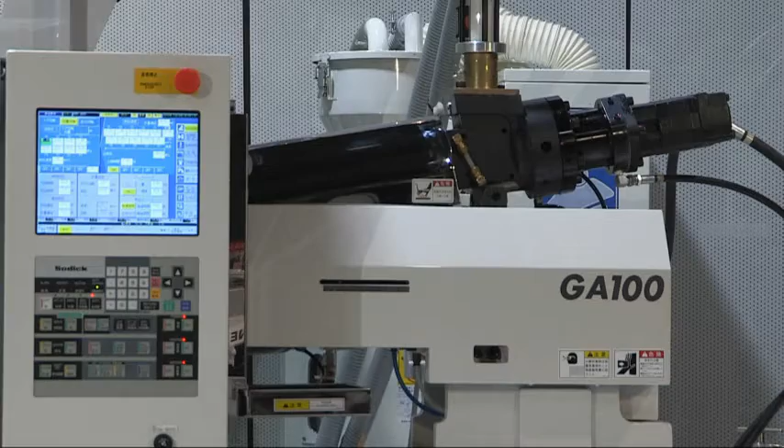Based on ideas which can only be offered by machine tool manufacturers, this machine was created by the integration of high-dimensional technology, which leads the next generation market. We would like to introduce the V-line method injection molding machine.

The reason why Sodick continued to develop the injection molding machine was the numerous unsatisfactory comments made by customers, saying that stable molding could not be performed by the general inline method molding machines. Sodick paid attention to the conventional screw pre-plastication method again and made great improvements with the unique technologies of Sodick to create this V-line method.

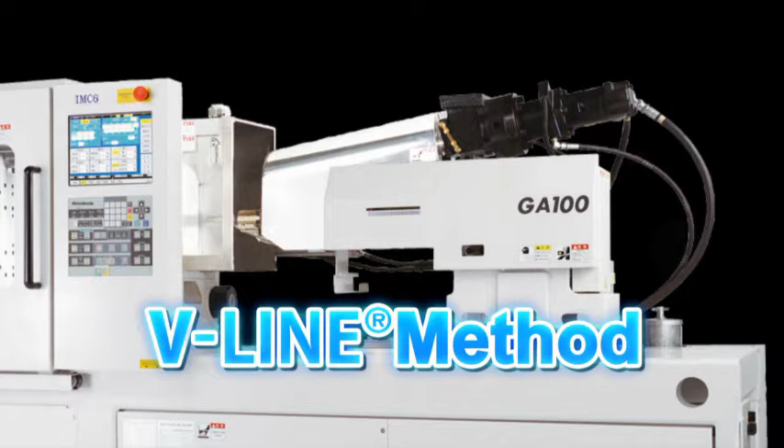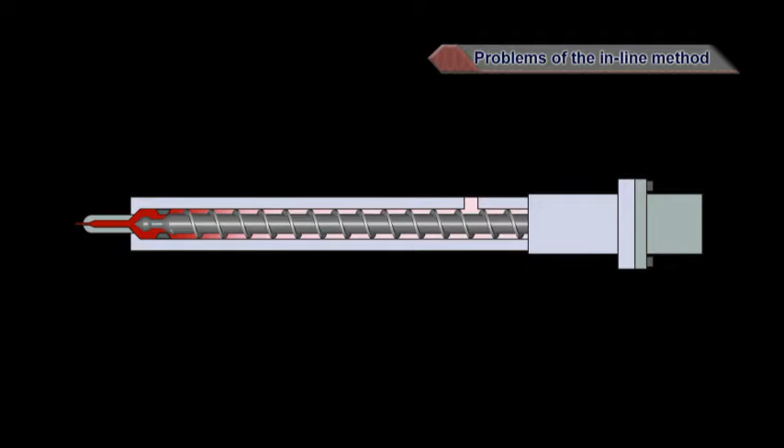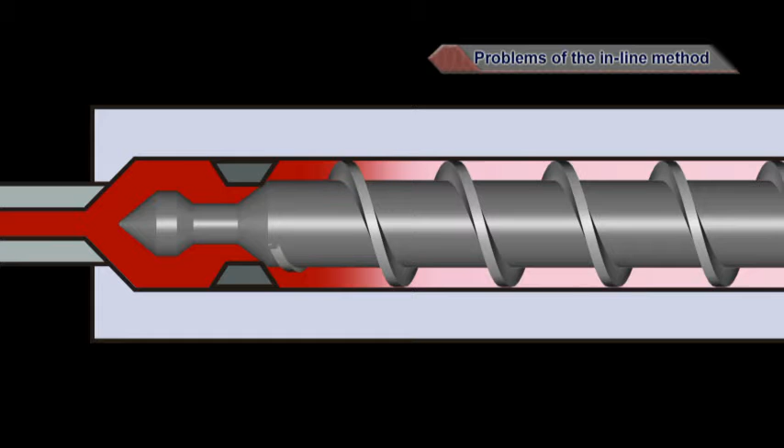In the inline method, a screw rotates, moves forward and backward to insert the molding material to perform the plasticization, measurement and injection operation. In the inline method, the resin measured despite the existence of a check valve flows backwards into the plasticization portion during injection. Moreover, sudden defects occur due to the variation in the amount of resin that flowed backwards.

On the other hand, in the V-line method, the resin can be plasticized stably by rotating the plasticization screw in a fixed position. The resin is stably supplied into the injection cylinder by the extrusion force of the plasticization screw and performs the measurement at the same time.

When the plunger reaches the measured value, the plasticization screw moves forward to shut off the fluid path, and the plunger moves forward to perform the injection without backflow.

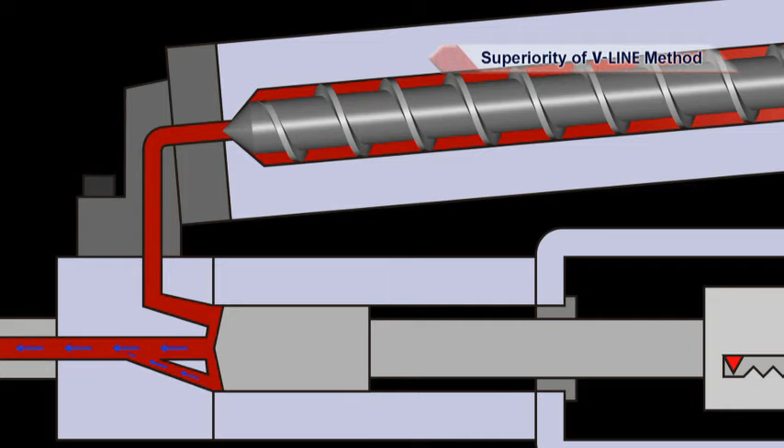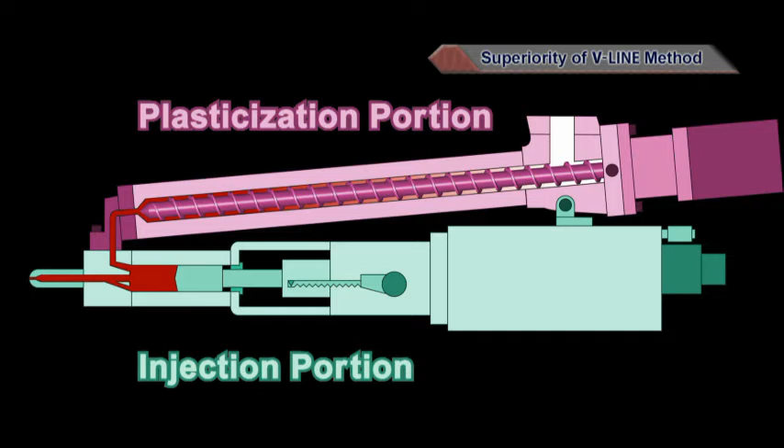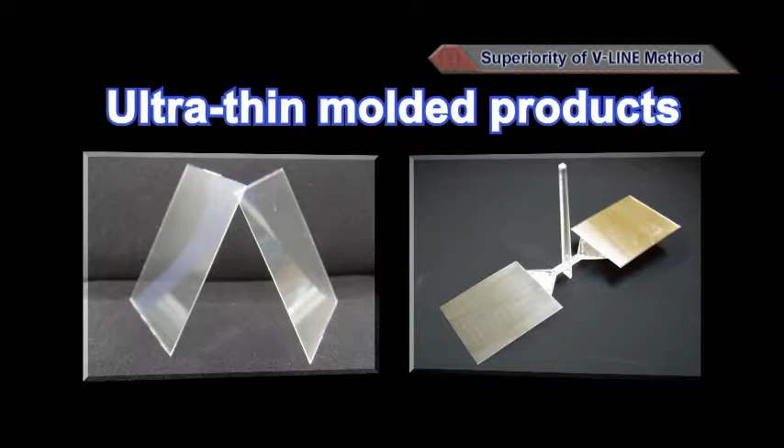Sodick is proud of this V-line method, since the plasticization and injection portions are separated. Stable plasticization, accurate measurements, and injection can be performed at all times. Compared with the inline screw, since the plunger which performs the injection is extremely short and lightweight, it demonstrates its best ability in high-speed injection molding of ultra-thin products and molding of ultra-small products.

Now we will show you movement of each portion in more detail. First, the mold is closed and the clamping force is applied. The resin is supplied into the plasticizing cylinder from the hopper.

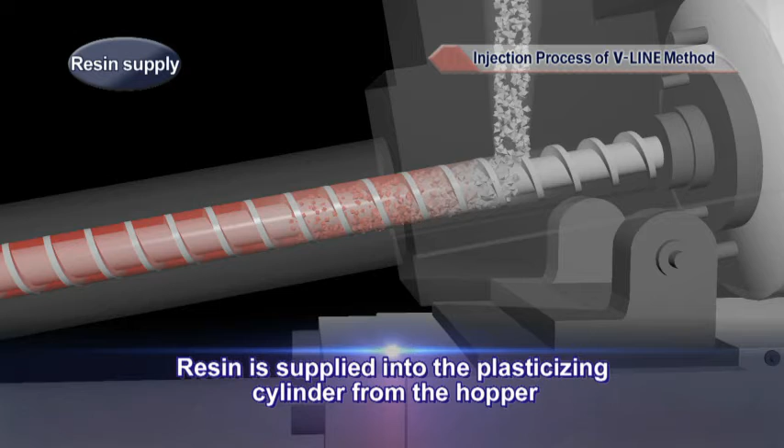The resin passes through the plasticizing cylinder by the rotation of the plasticization screw. While passing through, the resin is stably melted because the melting starting position and the completely melted position are always the same.

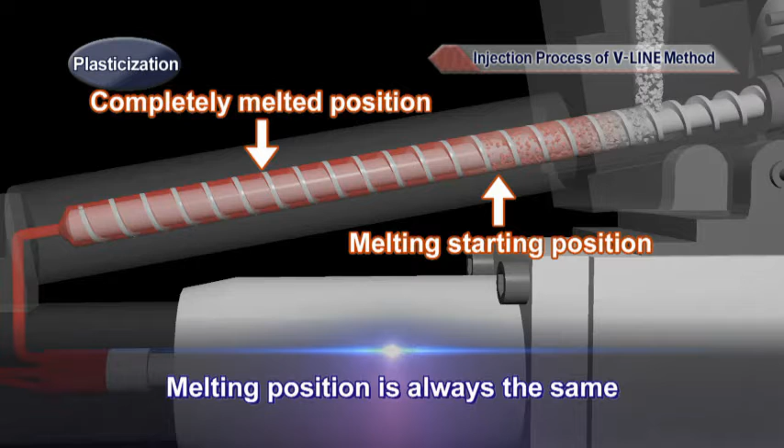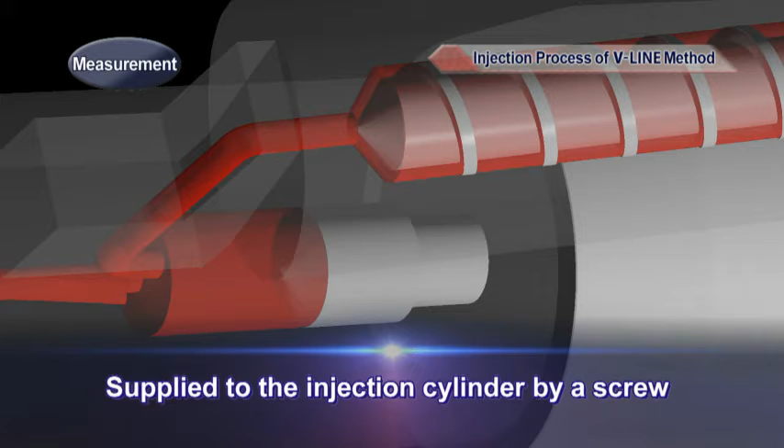Melted resin is supplied to the injection cylinder by the extrusion force of the screw. The plunger moves backwards with this resin to perform accurate measurement.

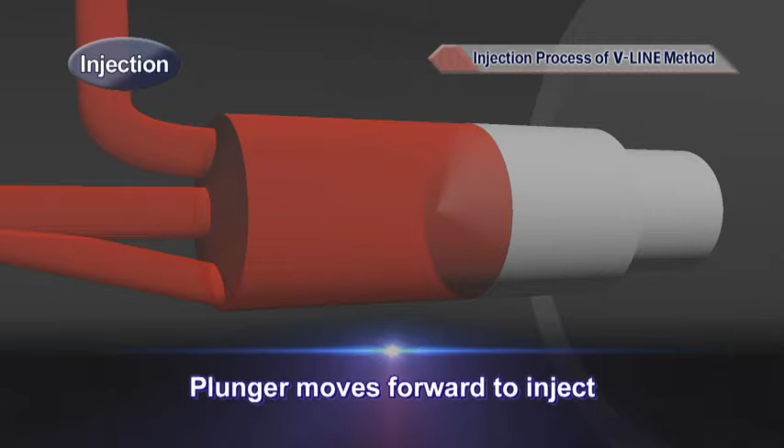After the plunger reaches the measured value, the screw moves forward to shut off the fluid path to prevent the backflow of resin. Subsequently, the plunger moves forward to inject the resin.

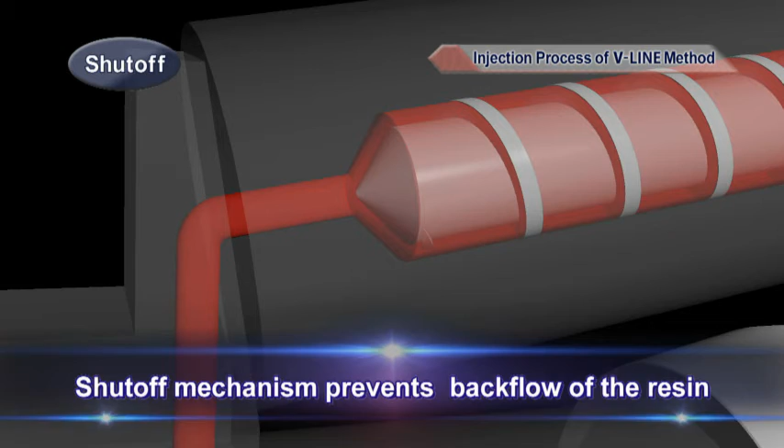After the injection is completed, the screw moves backwards to open the fluid path. The screw rotates again to supply resin into the injection cylinder. After the measurement, the screw moves forward to shut off the fluid path.

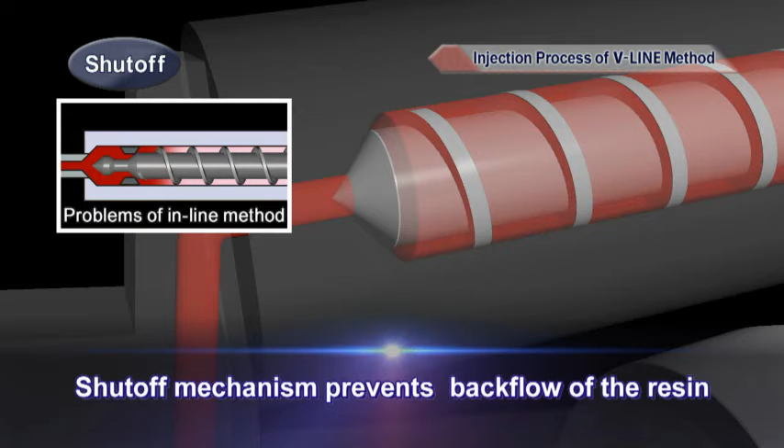In the V-line method, the adoption of such a screw touch method shut-off mechanism completely prevents the backflow of resin, which is regarded as a problem in the in-line method. Since a non-friction plunger method is used, the holding pressure can also be controlled accurately.

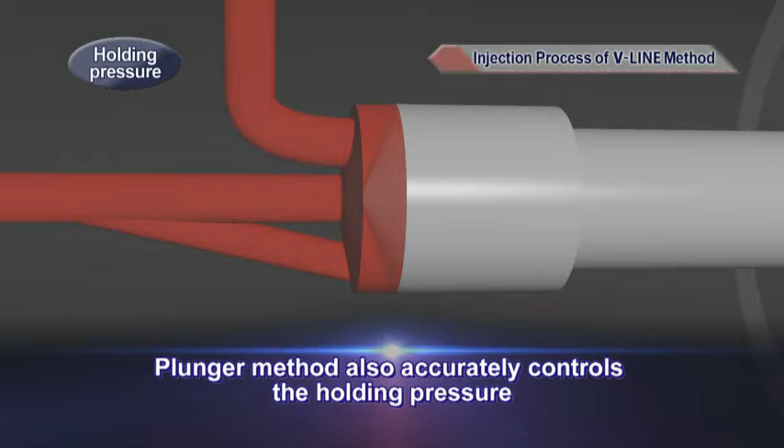After the set cooling time has ended, the mold is opened to remove the product. Subsequently, the mold closes again to repeat the same process.

As shown above, the V-line method injection molding machine performs stable plasticization, measurement, and injection at all times, and accurately seizes the market needs to enable the production of stable molded products.

Sodick is the leading manufacturer of NC EDM and high-speed milling centers. With these machines, molding which could not be performed with a conventional machine, such as magnesium molding and LIM molding, can now be realized, not only plastic molding. This is the Sodick V-Line method injection molding machine.